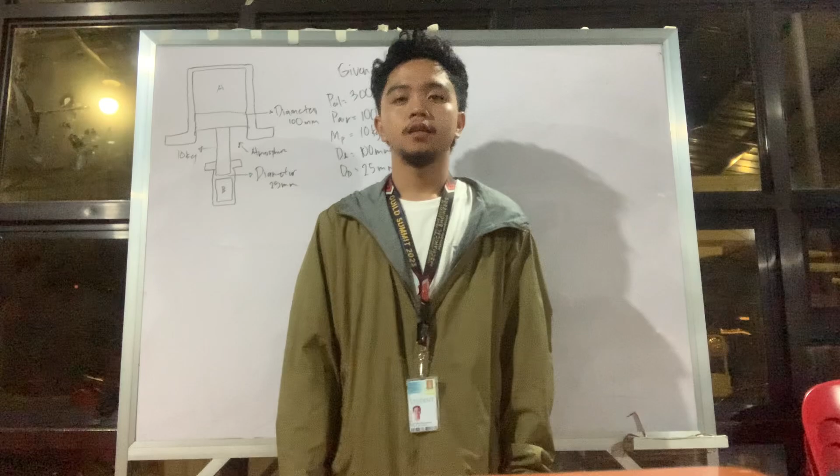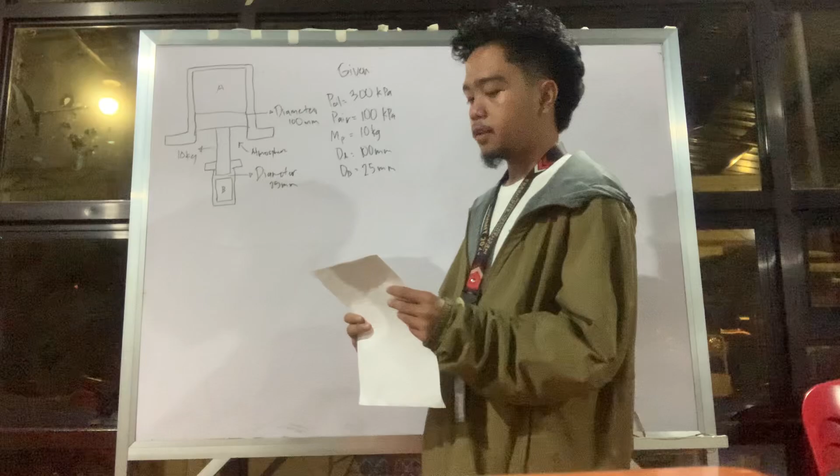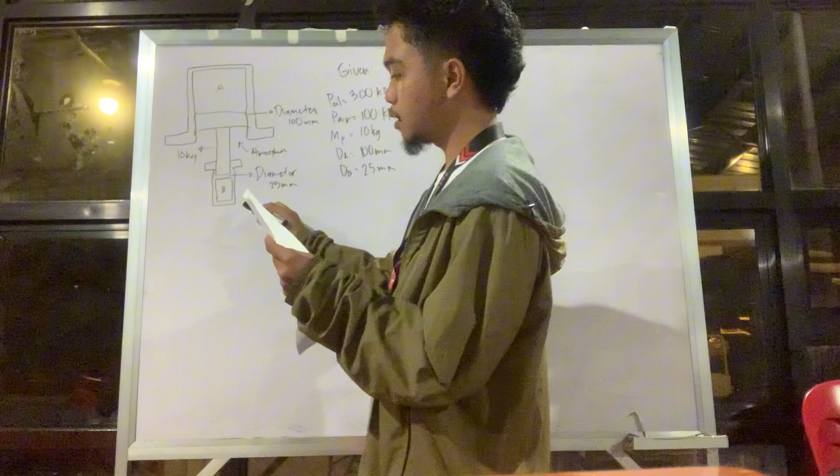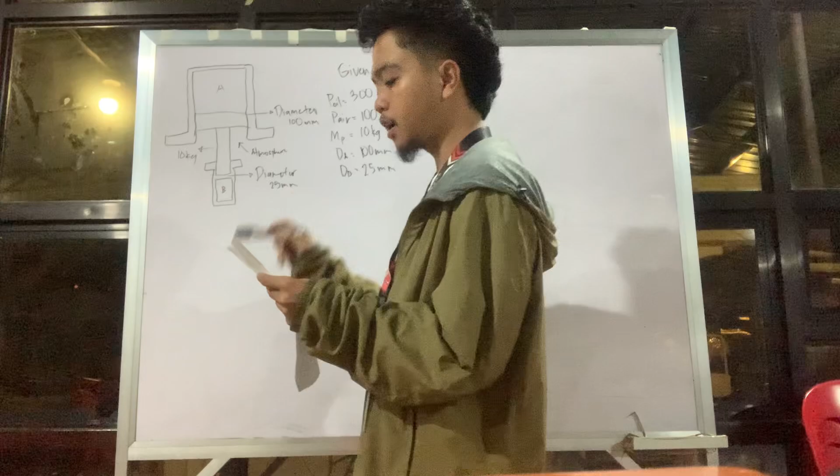The problem is there are two cylinders A and B connected by a piston of two different diameters as shown in the figure. Cylinder B contains a gas and cylinder A contains oil pumped to a pressure of 300 kPa by a hydraulic pump. The mass of the piston is 10 kg. Calculate the gas pressure in cylinder B.